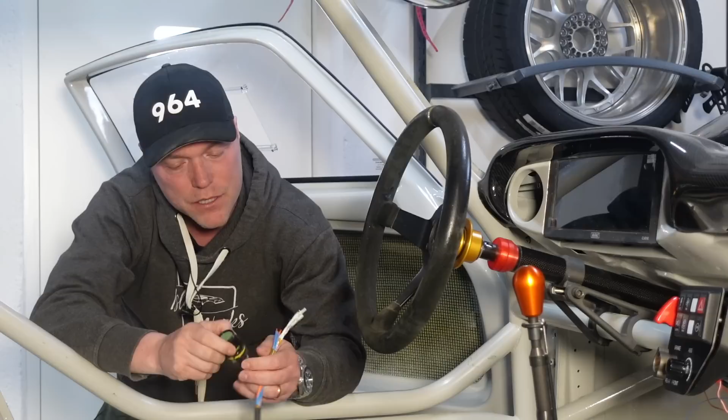In one of the previous episodes called Concentric Twist, we were building the wire harness concept, which ended up with a lot of different connectors and pieces and cables around the car. This time it is power on, which means we're going to actually turn the car on, finishing up the last pieces of the harness, trying to get things to work together, and seeing if we figure it out.

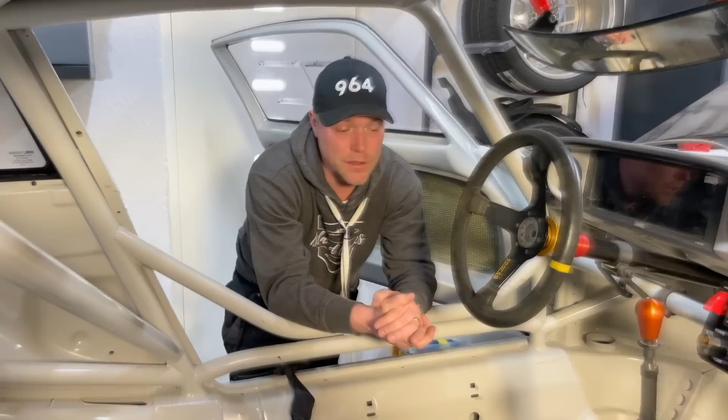So we're going to start off sort of where we left off last time. Not exactly, because I've been working away, really working away, getting things done when it comes to the harness and the engineering of it. It's an extremely tedious job, and it sometimes feels like I have a little bit of water above my head with this. Nevertheless, I have my two main harnesses done, and it's time to tie the whole car together today.

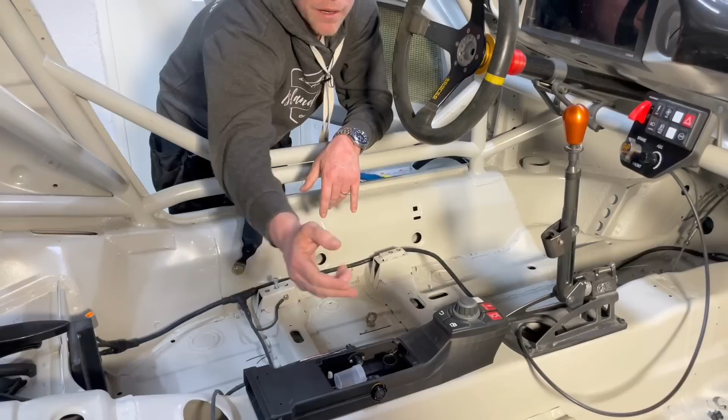So we're going to tie the different components we've built throughout the series together and hopefully turn the switch on. We have the center console here with the VCU for the suspension, the ABS yaw sensor, and the CAN bus controller. Up here we have our dash connector with the kill switch and the ABS strength, and of course the dash itself, which needs to be connected too.

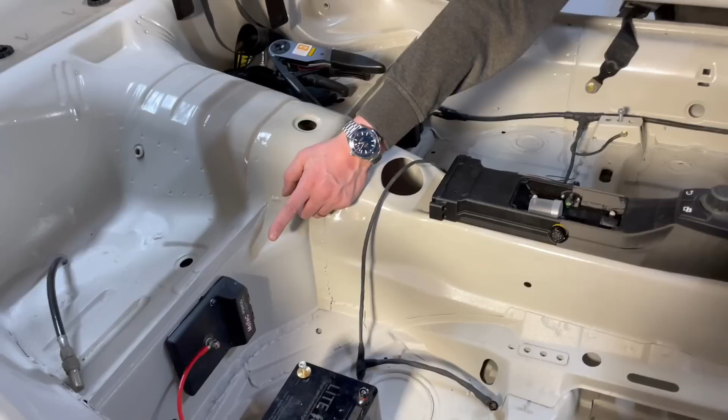We have the ECU that it needs to connect to, and on the other side we have the PDM, which replaces all the fuses and relays. And we have the battery now.

In one of the previous episodes, I was really debating with myself whether the battery should go in the passenger footwell or up in the front, or where it should actually go. In the end, I concluded it needs to go behind the passenger seat. That's where I put it, and that's where I've also put the PDM.

I've made up the harness for the other side. Let's get that installed and look a little bit at how the harness has turned out.

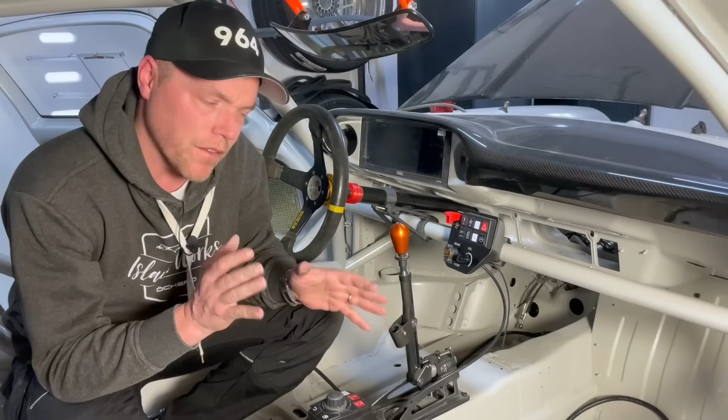Something I've paid a lot of extra attention to is how to do the transition between this compartment and the frunk in a way that's very serviceable and also looks very good. That's very important to me, which means I need some way of connecting these two compartments.

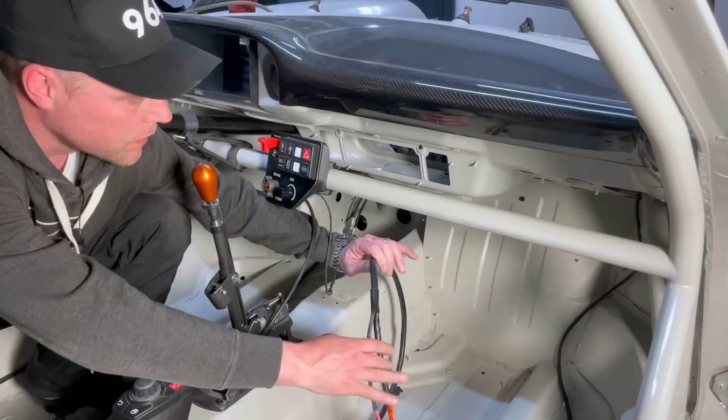What I've been looking into is whether I should use this area up here, which is where the fan used to come in before, and I don't use that anymore. So my idea is to put something in this compartment so the cables can very neatly come up and transition through.

These two looms here — this is the power connector to a lot of the heavy consumers, this is for a lot of the smaller consumers, and this is coming from the PDM, which as you can see isn't terminated yet.

So if this one could come up in a neat way here, I could create a very functional piece that makes the car very serviceable, which is good if you need to fix something, but also makes it look really cool.

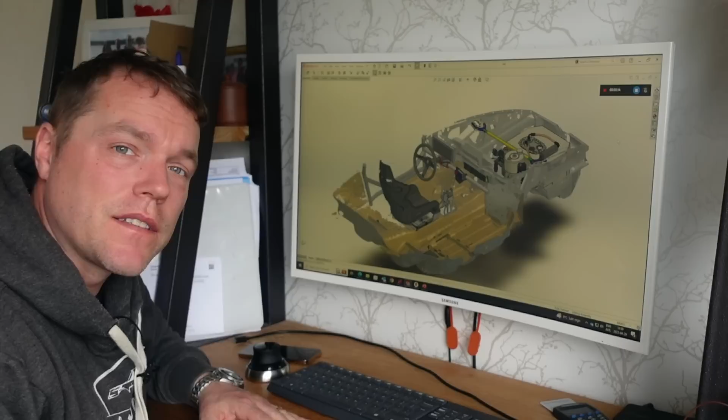Back in the office with the computer, let's look at what I'm trying to achieve with this bulkhead connector box and see if we can visualize it in a different way. The design is more or less done, but I'll show you the thought process of getting there. This is the assembly of all the different things I have in the car right now.

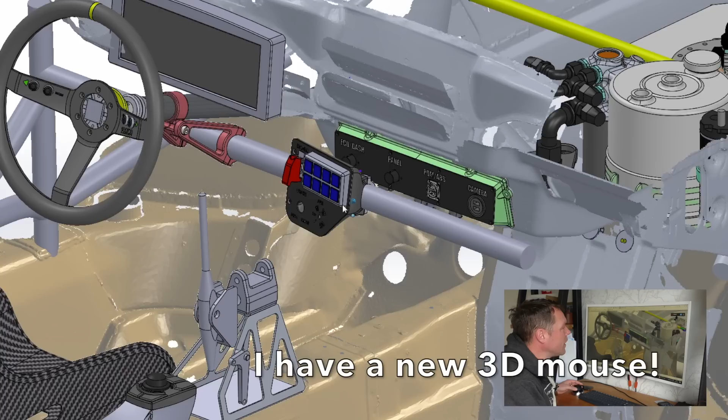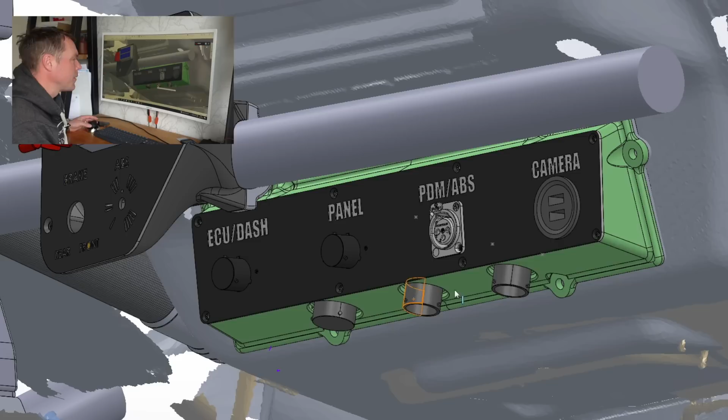What we see here is the little button panel, and if we scroll under this, we see this unit, which is the bulkhead connector box, as I call it. We see some different inputs on this one. Looking from this side, it's a bit of an awkward underneath angle, but we can see the different connectors.

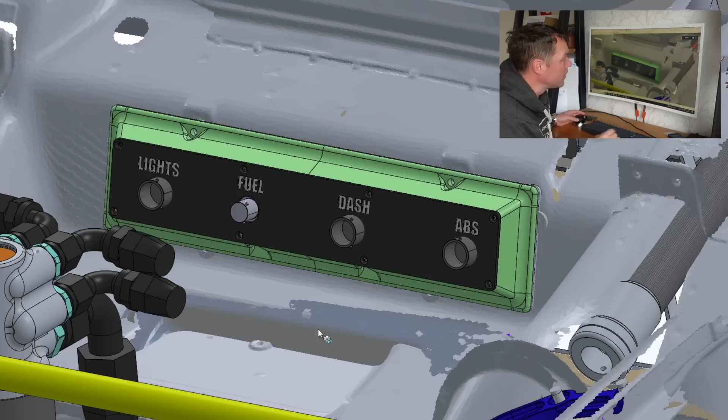We see a cover plate on top, and if we go around and look from the other side, from the front where we have the tank, fuel tank, filters and so on, we can see the connectors going out on this side toward the equipment that sits here. We have the output toward the ABS, the dash, the fuel, the lights. Not completely done on this side, but I don't think that's really the point.

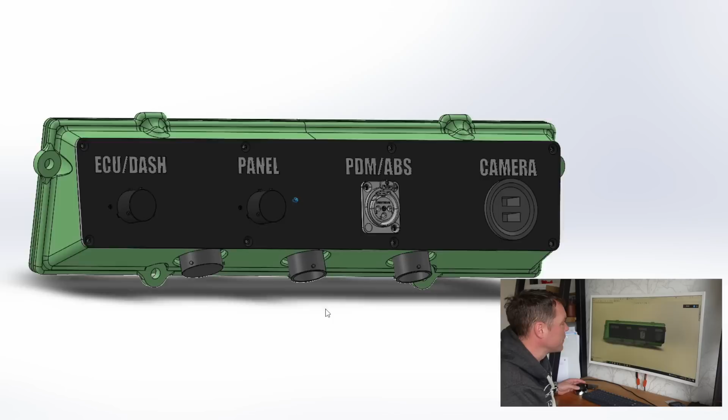The concept is here. Let's look a little closer at this actual unit. So if we look at this, what it is, we see that we have three big incoming things. One comes from the ECU, and two of them actually come from the PDM. And then we see outputs in the front.

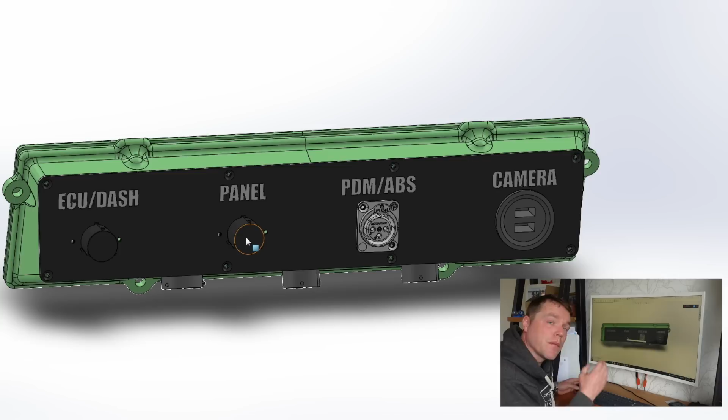We have the USB charger for the camera, because you need to have a camera in a car like this. We have the programming input for the PDM as well as the ABS. We have the panel for the little keypad. And then we have a programming output for the ECU and for the dash.

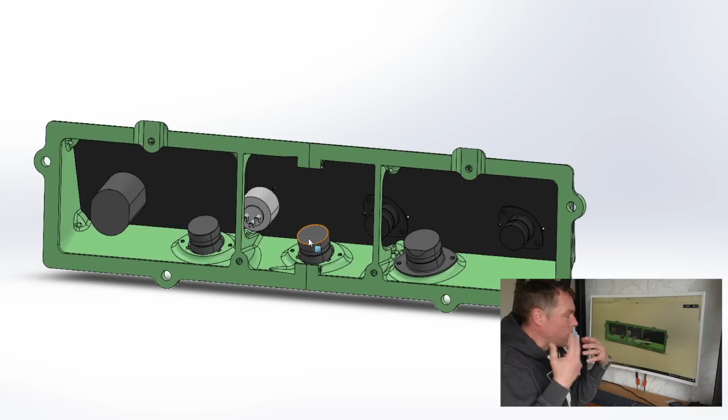If we split this one, let's split it like that. If we split it and look on the inside, we see that this is where all the magic is going to happen. We're going to pull cables in as orderly a fashion as possible on the inside. And if I ever need to change anything, pull a new cable or insert a new connector for whatever reason in the future, which I'm sure I will have to do, then it will only affect this area and possibly a new little sub harness.

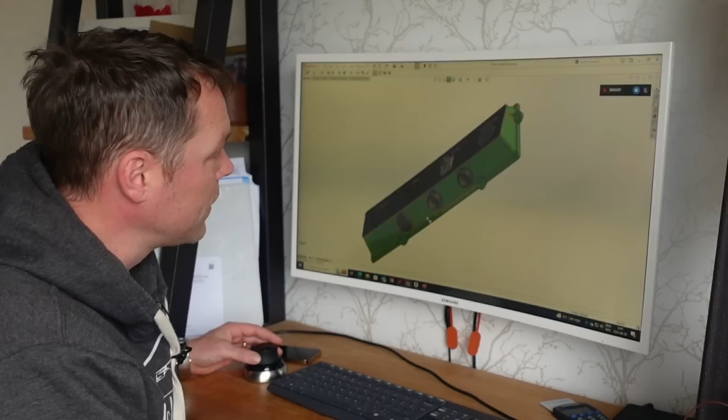So really good - the green piece here is going to be plastic, and the top piece is going to be a thin, coated piece of aluminum, just like I did on the little keypad. It's going to weigh just a few hundred grams. It's going to be really, really neat. And these connectors are super lightweight as well. So yeah, this is the concept.

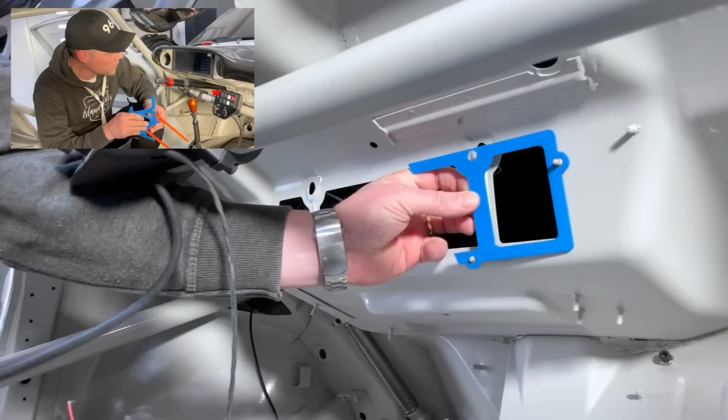Let's tailor this so it fits the car. The process is to print a number of pieces and try to see if I can get the holes and all of that to really tally perfectly with how the actual structure looks. Based on that, I can make a real transfer piece. And with all these iterations, you eventually get to something that starts illustrating a little better what the idea will look like in the end.

This is one of these pieces - color is brilliant, of course, as usual. I'm going to assemble this one in there properly, and with this one assembled, we're going to try to hook up one of the harnesses and see what we think about the idea.

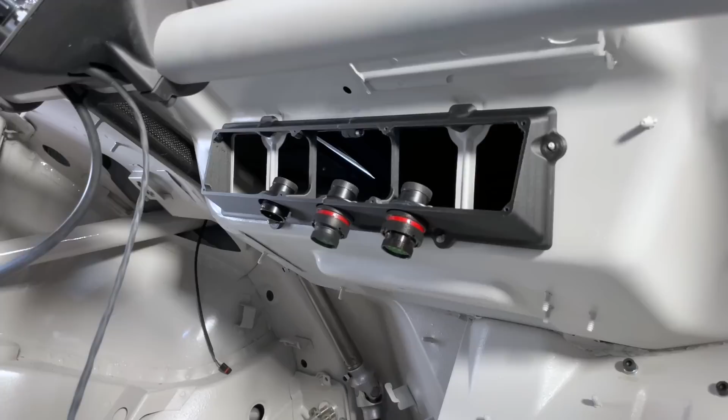This is the piece, right? It has the connectors in there, right? And I just used the little things I had there.

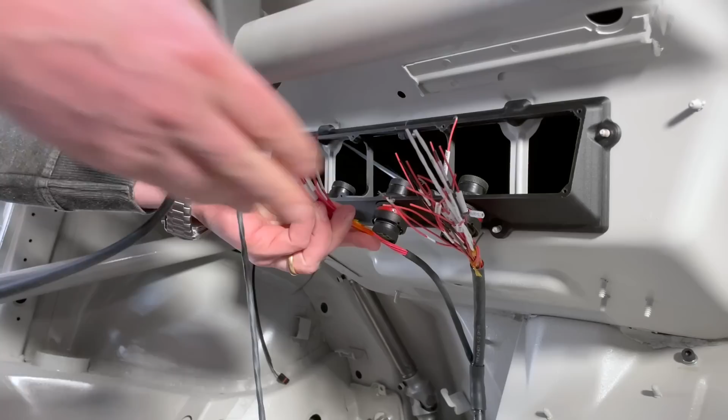Okay, so this is now the concept. There we go. Of course these ones are going to be terminated, so they look like that and they attach nicely to that one. I have one on this side that's already terminated, so you can see the boot is on it - it looks quite cool. And now that this one comes in there, it attaches like that. That's the way it's supposed to look.

In one of the previous episodes, I showed you that I had a left side harness, which is where all the signals run - the CAN bus, the communication between the different devices. It runs on the left side. Then on the right side, I have the power harness that goes from the battery to the PDM, to all of the consumers, distributing the 12-volt system of the car.

So that's this harness. I'm going to terminate the last two harness pieces. If you look at this one, you'll see it has slightly bigger pins - that's because it's higher current. And then there's one with a lot of pins that are slightly smaller. This one is for big consumers like the ABS, mainly the ABS, and this one is for smaller consumers like the washer and all the other stuff, lights.

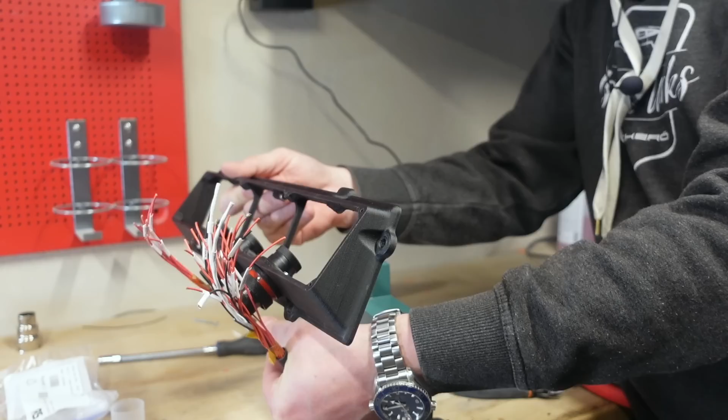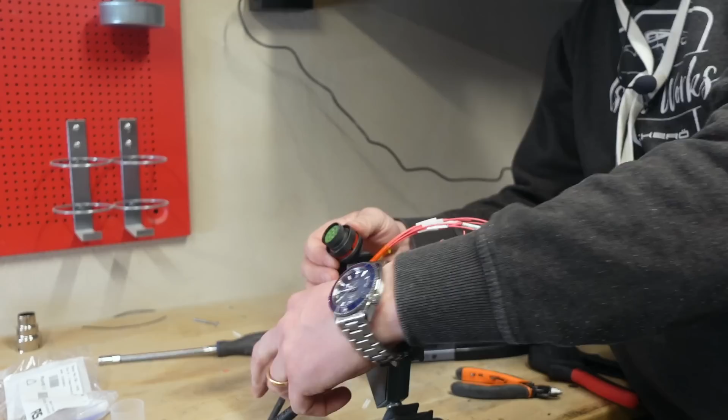So these ones are going to come up in this manner, so I know where they're going to terminate. Now it's important that I get the angle of these right. I'm going to start with the one with the bigger connectors and make sure I get this angle correct, because if I don't get it right, when I try to put it on here, it's going to be at the wrong angle and I won't be able to insert the connector.

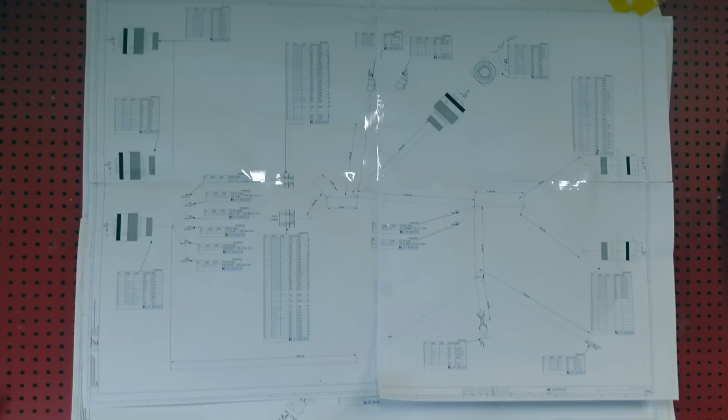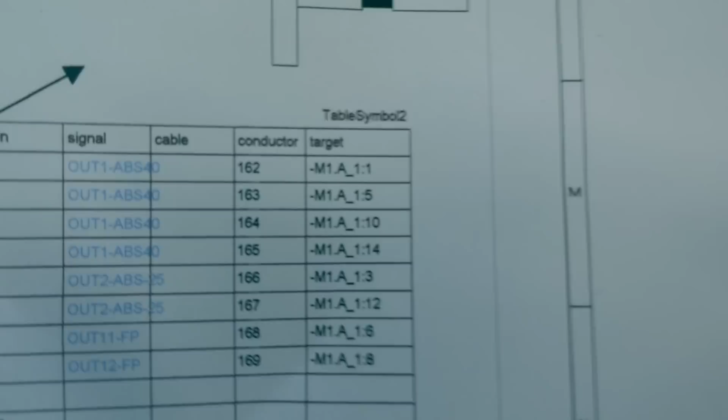So it's going to be here, it's going to be there. This is my drawing, I have it up on the wall, and I can see that this is the harness or connector we're on. I can see that cable number 1 is 162, so that's the first one I'm going to identify and insert. Okay, so this is 162.

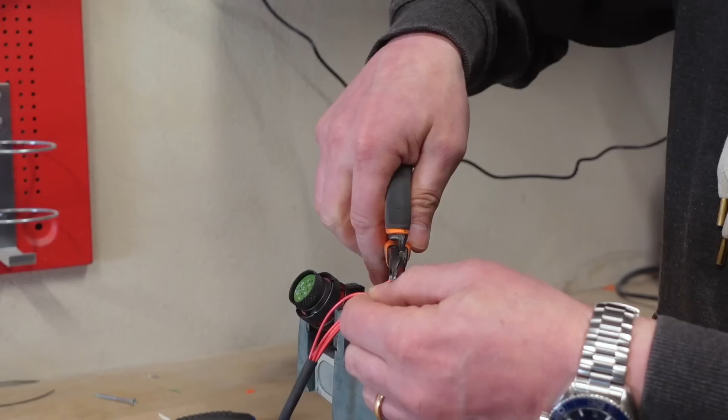I'm going to align it so that this end is by the end here. I'm measuring down so that it's towards the end of the connector, taking it off and then stripping it.

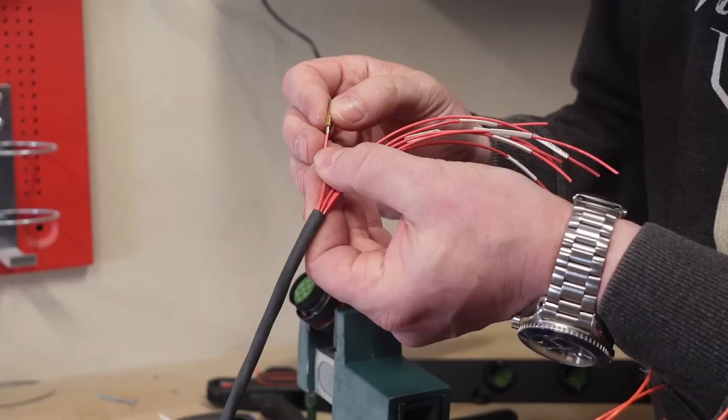Then we get to this guy. We're going to adjust this to AWG 18 because this is the high power cable, so they're AWG 18. So we take that one in there, we take that one in there. Now we have a really solid connection there. Good, I put it in through the connector.

There's a tool you can use to do this, but these cables are so big, AWG 18, that they're so stiff in themselves that I don't really need that. And then you keep doing this for a while. As you can see, it's not very difficult, it doesn't take a lot of time.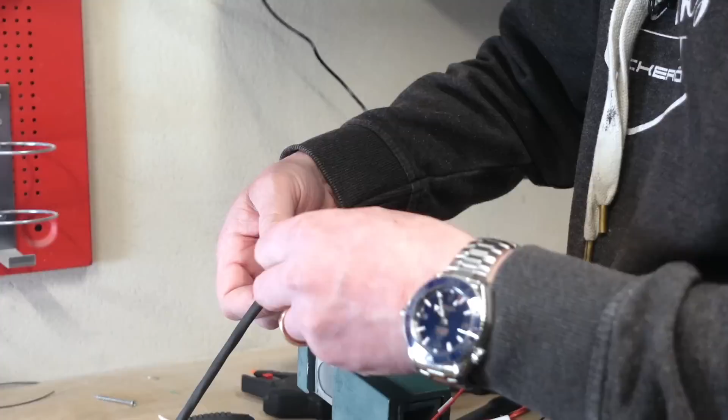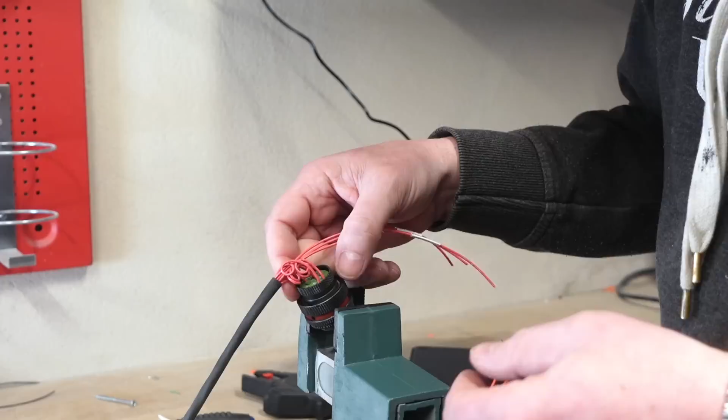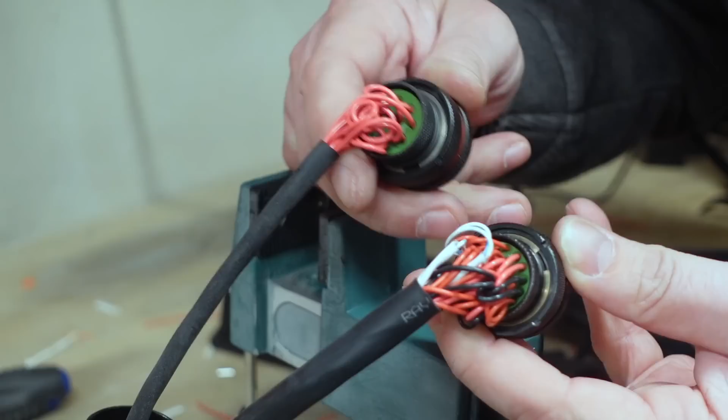Now that all of the other stuff that really takes a lot of time is done - and the stuff that really takes a lot of time is, of course, building the harness, and what takes even more time than that is designing the harness - in the end, we came to this: two nicely contacted pieces that we're going to do some other stuff with now.

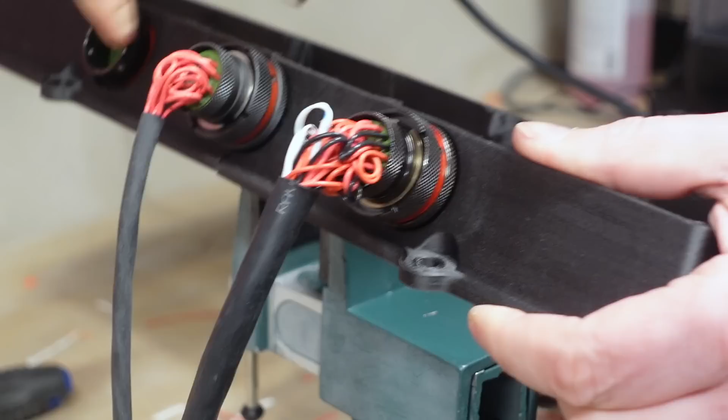The first thing we're going to do is attach them to where they're supposed to be, which is just here, here and there. Good, they do seem to fit, both of them, and this is indeed how they're going to sit. So it seems like we got the angle pretty good.

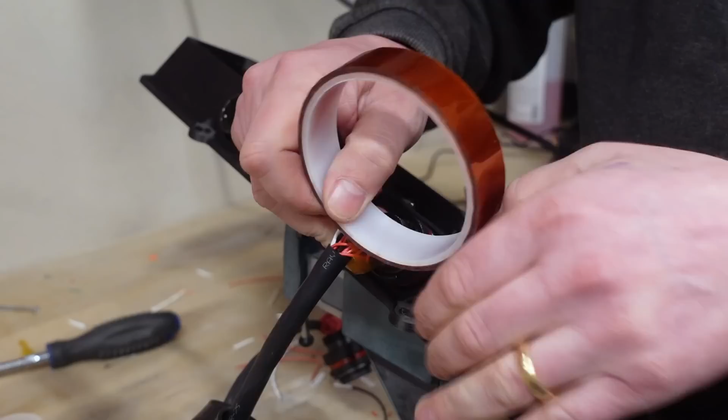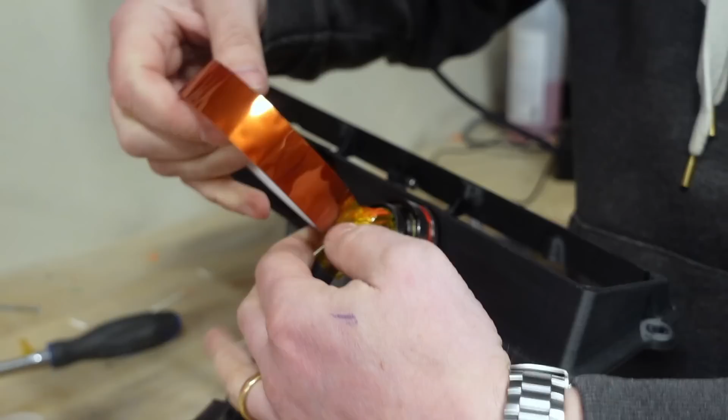Next thing I'm going to do is take some of this kapton tape. I'm going to tape this for service purposes, so if I need to go in and repair this at some point in the future, it's not going to be all glued up. Because I'm going to put a boot on this, and once I put a boot on, that boot is going to sit there with some pretty nasty epoxy resin.

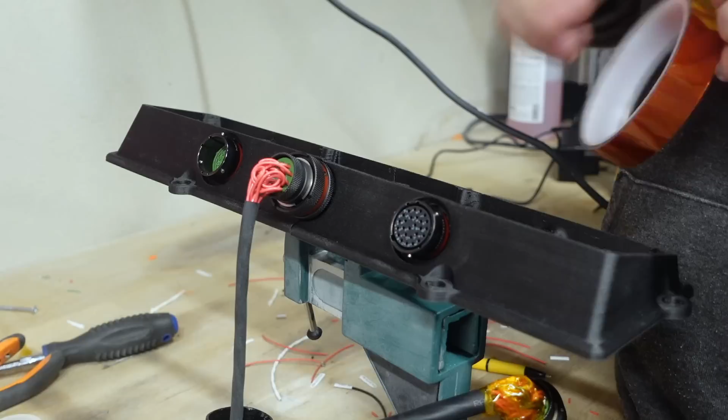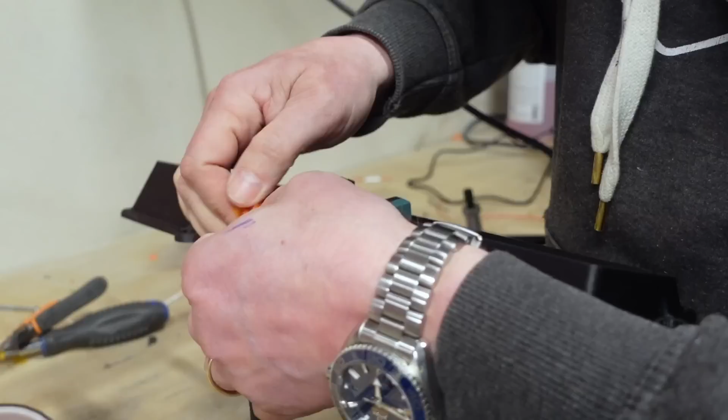Okay, like that. And the reason you also put these little loops there - it's not only for service purposes, it's also so that if you need to cut the wire in the future, you have a little bit of extra wire here.

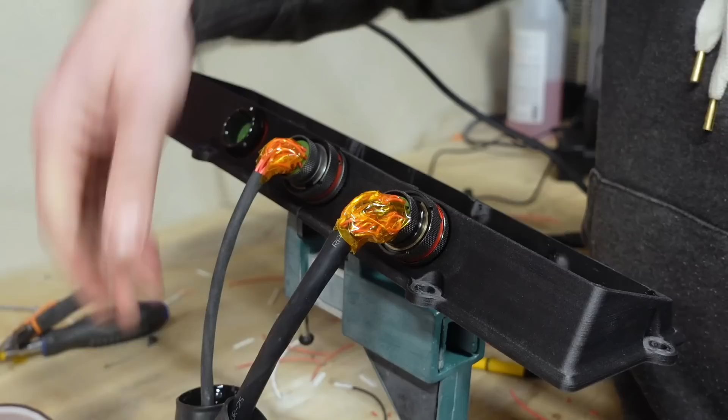Now we get to another pretty interesting step, and that is to shrink the boot down on this. So I put the boots on it. These need to get as accurate of an angle as I can.

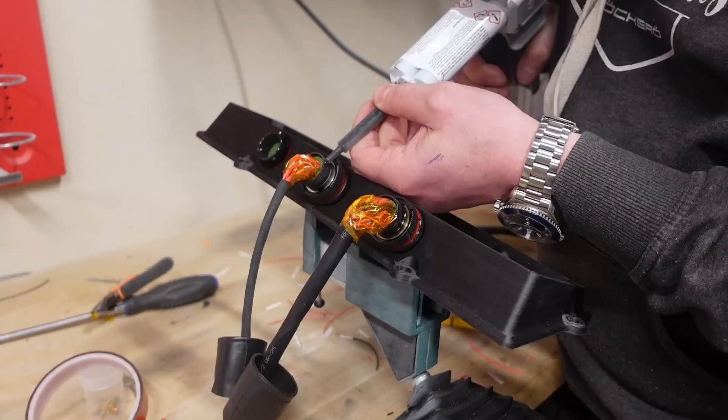So what I'm going to do is put just a little bit of glue on this little hat here, because this is the side I'm going to start. The kind of glue I'm using is a resin, it's called potting compound. So I'm just going to put a little bit of this on this connector here, so that when the boot comes on, it actually sticks there.

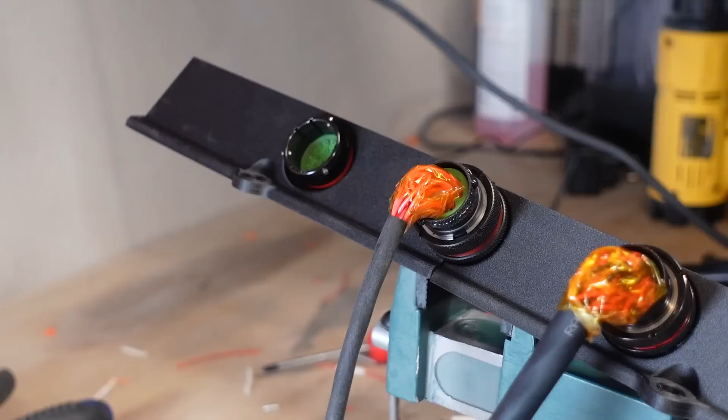So it becomes very liquidy. There are some tricks to this, and that is to really heat a lot on the lip of it. Get that one to grab first, and once that one grabs, then you can work on the shape.

So we have got it to grab on this side. Now we're just going to form the shape of it. And before I do that, I'm going to add some potting compound in this end. Actually, I think we got that one down there pretty good.

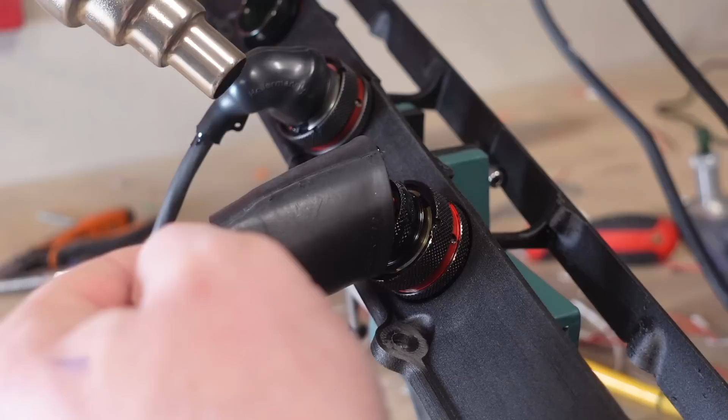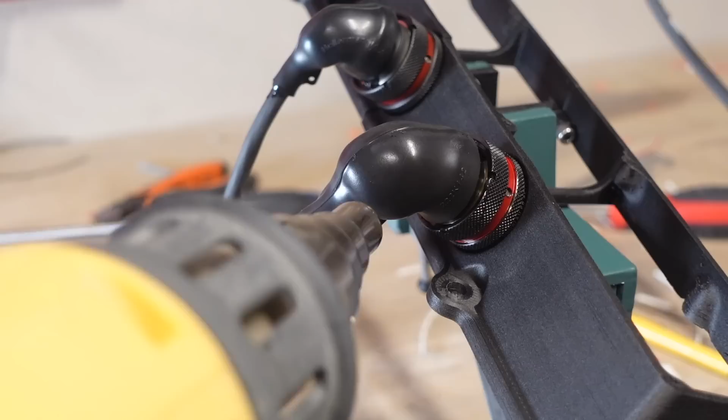Okay. I think this is actually pretty good. Yeah, let's put it back in the car.

Okay, so we got the thing installed. An amazing piece of work just trying to get this thing together. Let's see if I can film and attach this all at the same time.

Oh, there we go, first one. Let's see, second one. Pretty good, huh? Third one. Oh, that looks pretty cool, doesn't it?

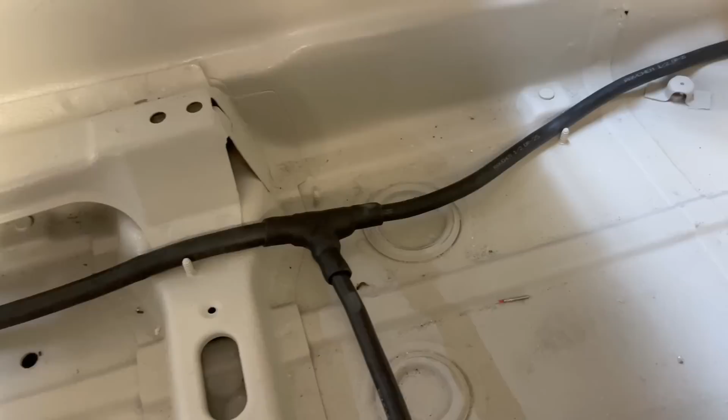So let's have a look at how this turned out. It goes down here, with a little branch off point that continues on back to where we have the battery and the PDM. As you can see, I haven't put the boots on the PDM yet, because I want to see that it works first.

I did connect the PDM to the battery, so it should run soon. The battery is hooked up, the CAN bus to the battery, as well as the kill switch to the battery. There's an interconnector here that connects the right side of the car to the left side, where the other harness is running. And then we branch off and go up to the center console here.

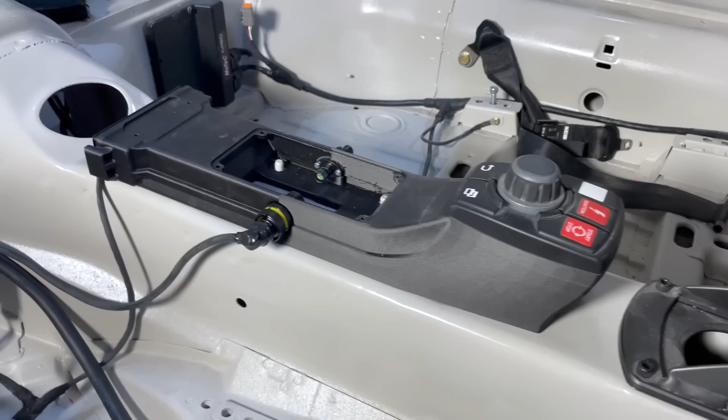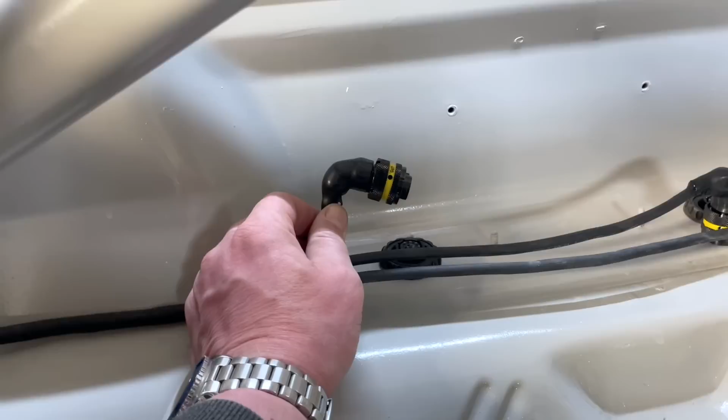Then I wanted to show you something I did with the branch that goes up here. I have one branch that goes all the way up to the very back, with two connectors. This one actually goes to the right wheel, and it sits in a little insert I made with a big thread on it.

This insert then goes to this connector, which ties down like that. So that will go to the right wheel, and this one over here will go to the left wheel. Cool, huh? And then it will continue back to the engine.

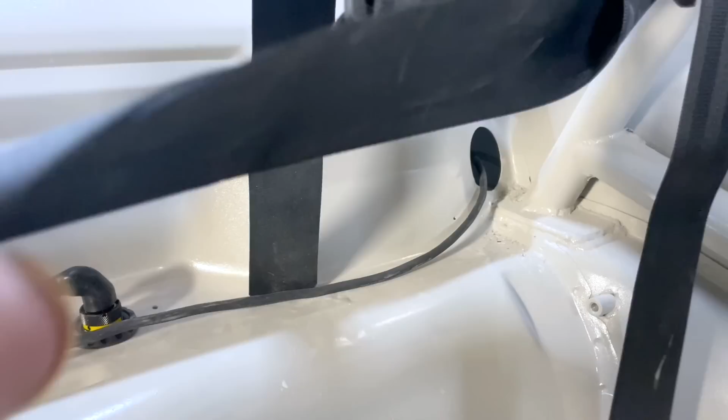There's one small harness piece missing, which will go from the engine down to the ECU, connecting to those two contacts there. And the strange thing with all this is that you can't see how much work goes into just fiddling around with these cables.

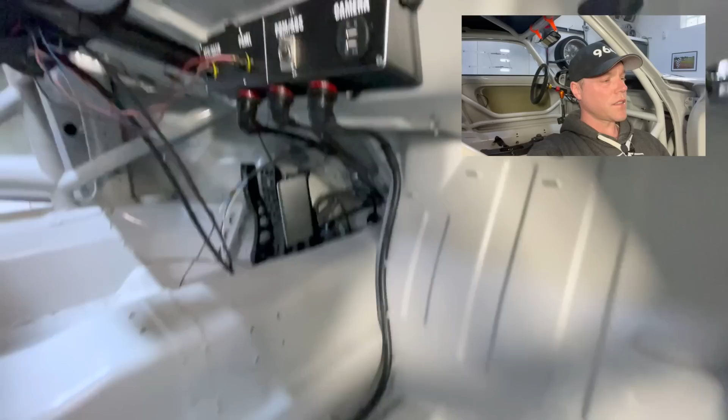You really can't, because in the end it's just connectors, and it looks like something you bought in the store, but it's really a fantastic amount of work. That's why it's taking so long to get the episodes out. But where I am right now, it is actually time to maybe flip the switch.

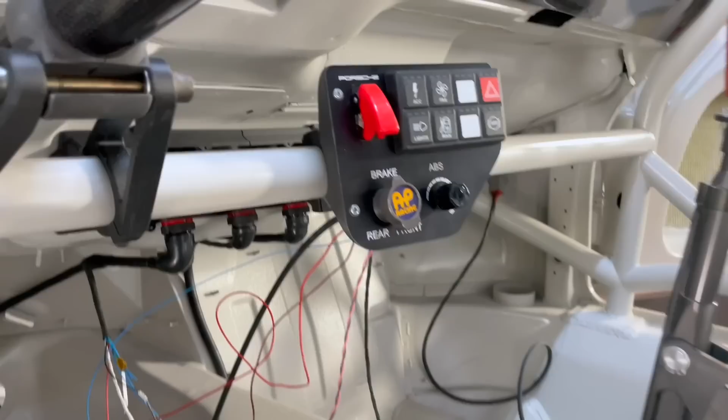Okay, so here goes test number one. I have the battery connected, and I put a multimeter just measuring on the battery. Then I did a very temporary installation of the keypad dash there.

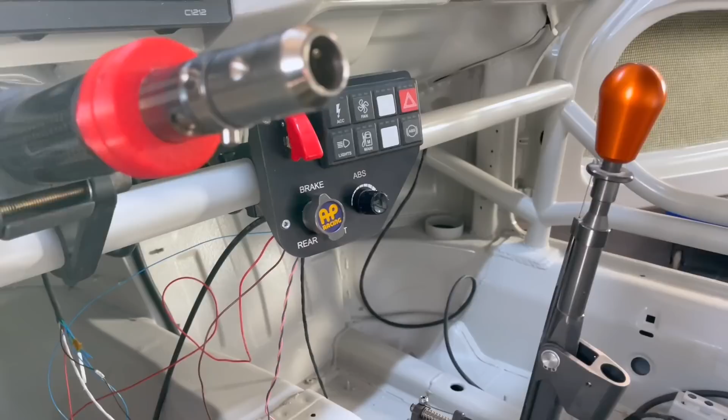It looks like this. The CAN bus is connected, the kill switch is connected. I know this looks terrible, but nevertheless, we have 0 volts right now.

And if I go over here, oops, and I turn the car on, nothing happens, right? Because nothing is really the way it's supposed to be. Now the battery is actually on. And if I flick the kill switch, boom, it should go off, and it did. This is because this Lightbox battery has an FIA approved kill switch built into it.

Then I will have one switch over here, and one external switch just over there. Cool, huh? Of course, that is one exciting moment, seeing the multimeter go to 12 volts. Sounds ridiculous, I know, but to me it was pretty exciting.

So moving on to the next piece, we get to the necessity of actually communicating with the car. Because I can flip the switch and the power goes on, but nothing happens. That's because I need to program the PDM so that when I push this button, this happens, and when you turn the ignition key on, this happens, and so on - all this good stuff.

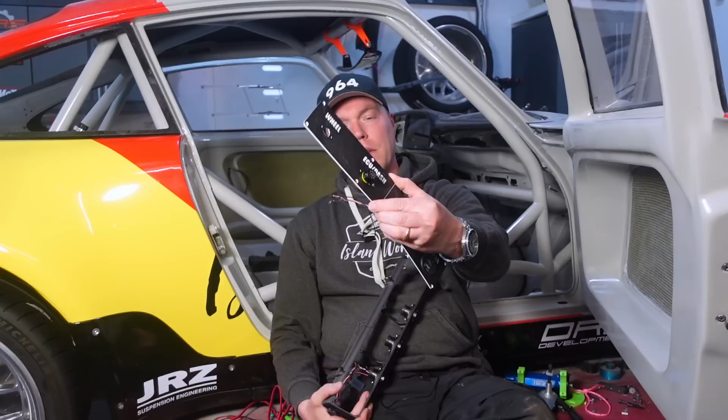I have this, which consists of this, plus, if you remember in the 3D model, a little plate on top of it. This follows the production methodology I used for the little keypad dash in the front, where the back cover is plastic and the front cover is a very nice, thin aluminum plate that I got help with from a Norwegian company called Myhre Skilt. I'll put the contact details in the description.

This version here is just a 3D printed one, and I had to do it in 2 pieces because my printer is too small. What's so important right now is this piece here - this is the one that is actually the connection point, the communication point to the PDM.

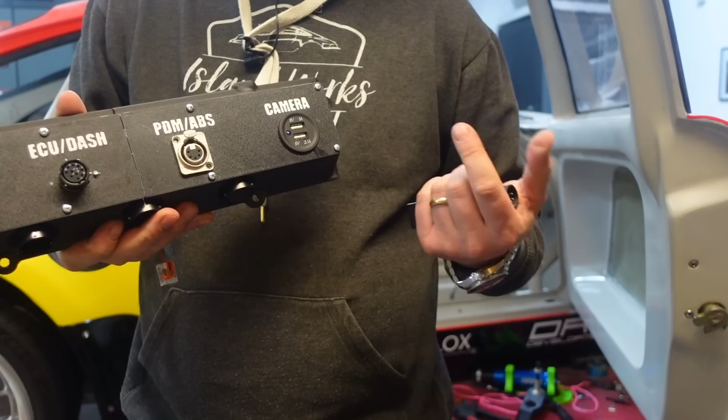So let me just hook this up and I'll show you. And we can see some goodies here. We have a camera port. This is to charge a camera because, yeah, we need this nowadays.

Next one here is PDM, so this is where I'm going to put my CAN to USB module to program the PDM. I'm also going to use this port to program the ABS, since I have one of these Bosch race ABSs. This is what it is when we look on the back side.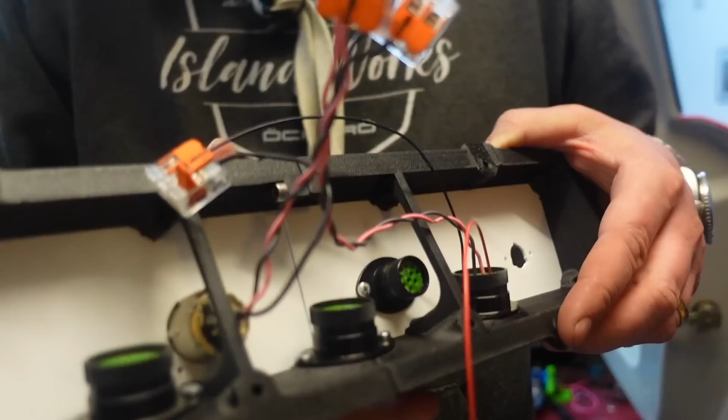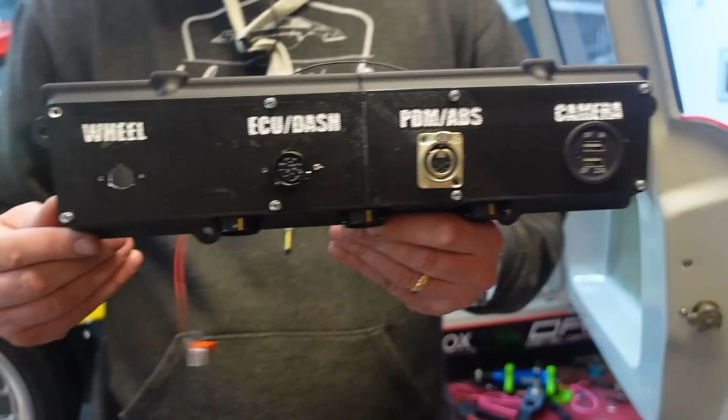Since this is just for test, I have just taken the CAN bus wires together. You see they come from the connector, and then they just go together in these little splice whatever things, and I've just pulled a few of them out. In the end, this is going to be nicely wired as it can be here in the back. You're never going to see it because it's going to be behind this one, and whenever I need to change something, I just change it here on the inside. Brilliant, huh? So we got this thing in there with the fake little plastic plate.

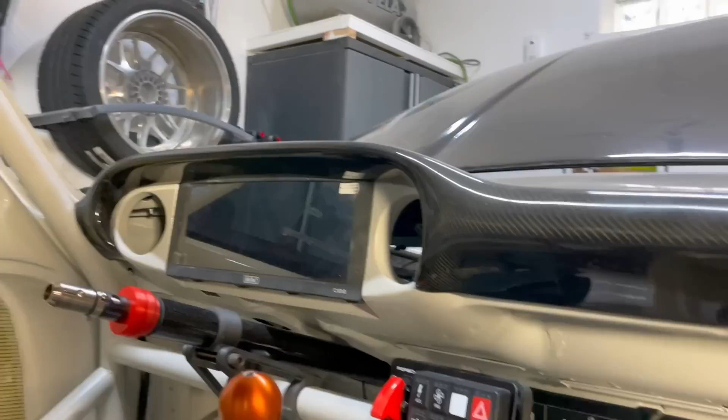So now we've actually connected even the dash. I took the opportunity to connect the dash as well. But now when I turn it on here, nothing happens. Although everything is connected, it's because the PDM doesn't know what to do. Right, power comes on, but now what?

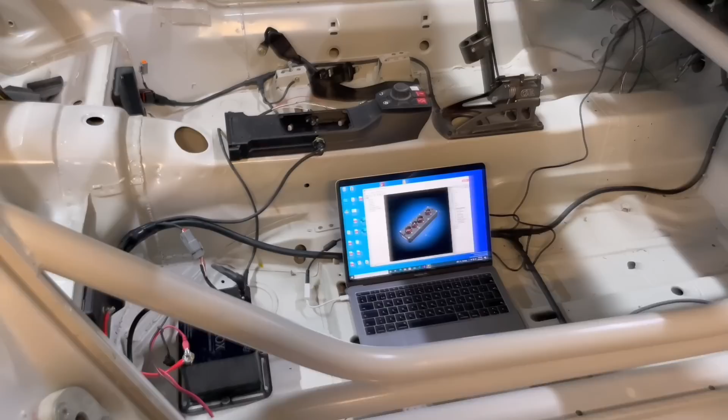So we take this little programming adapter and I try to stick it in over here. Come on. And now I get a USB cable. So just like in the previous episode, I think it's called Wireless Porsche, where I programmed this, I'm just going to reprogram it now so that it works, and then it should go on. So here we go. I have my computer here, and I have it connected there into the dash.

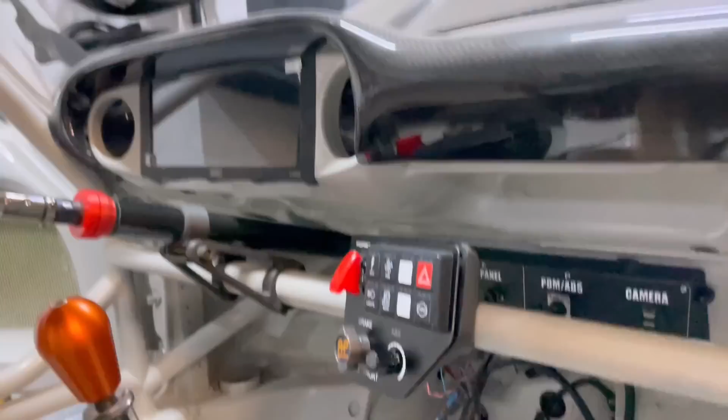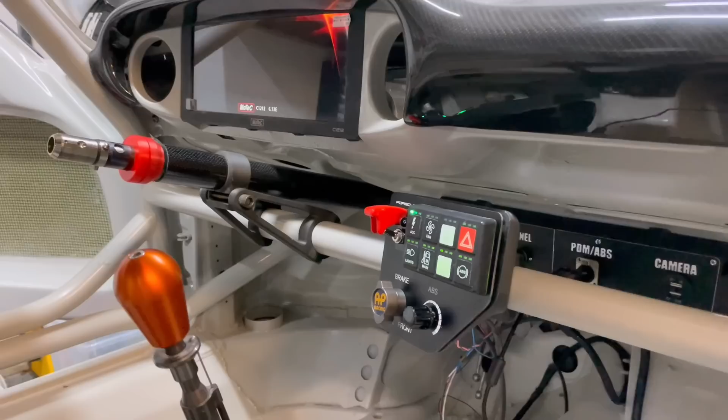I have connected the rest here so that it should be funky and ready to go. What now happens if I do this? Boom. Dum dum dum dum dum dum. Look, it's coming alive. And it is live. Look at that. Wow, it really is live.

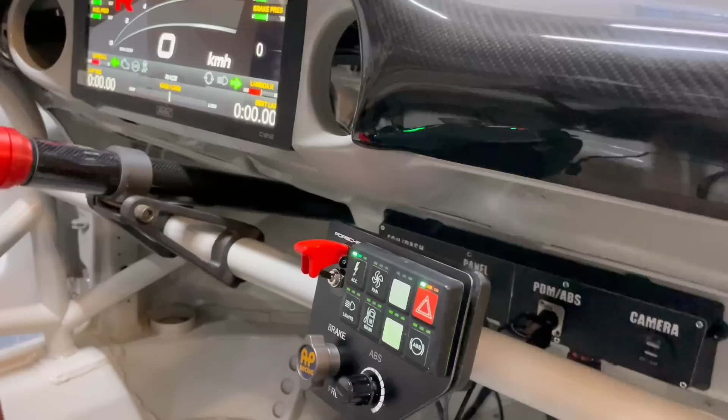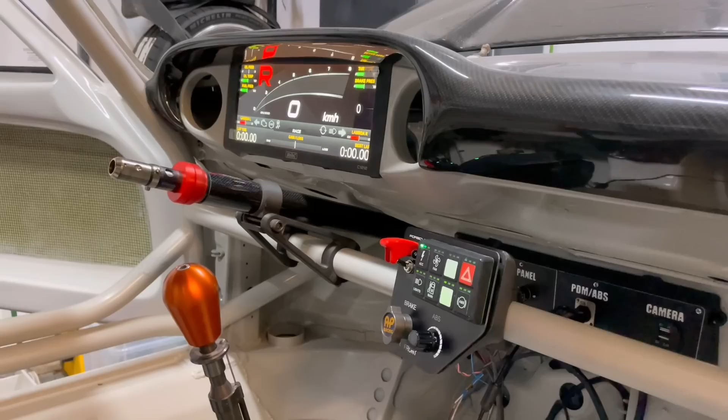And what happens if I click here? It actually starts running. Wow. And it's blinking over there as well. So CAN bus network is working, dash is working. I'm making some progress. And we're going to do the same thing from this side.

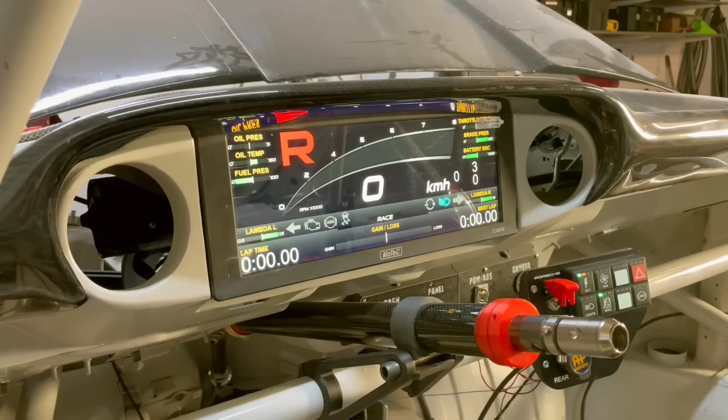So I'm going to turn this on. It will come on just in the same manner as it did from the other side. What I want to try now is if we can get the ECU to actually communicate with the dash. We do that by turning the ECU on, which is this one. What we should be able to see is that if I push the accelerator pedal down here, you see there in the top right, the throttle is actually working. Right, so the ECU is working.

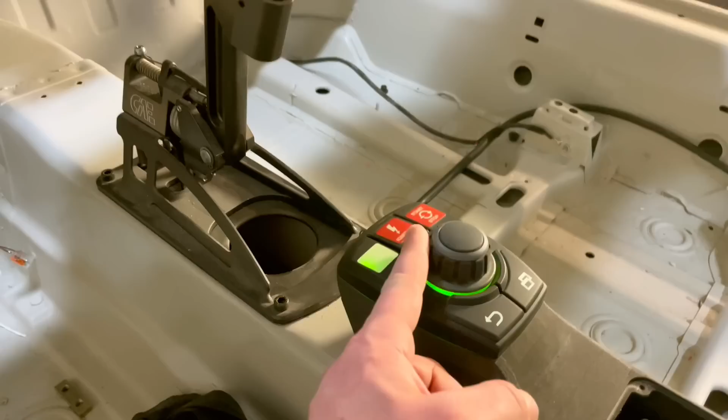I also want to test the rotary controller. So if I press change page on the rotary controller, it will work like that. If I turn this one, it's connected to the traction control on the ECU right now, so I will actually—it may be difficult to see on camera, but I can see that this one here changes color. So seems like it's all connected. I have not managed to get the CAN bus from the battery, so I can see the state of charge on the battery and the state of the kill switch and all those things, faults, alarms, whatnot. I simply can't get the CAN bus to work, but yeah, I'll figure that out.

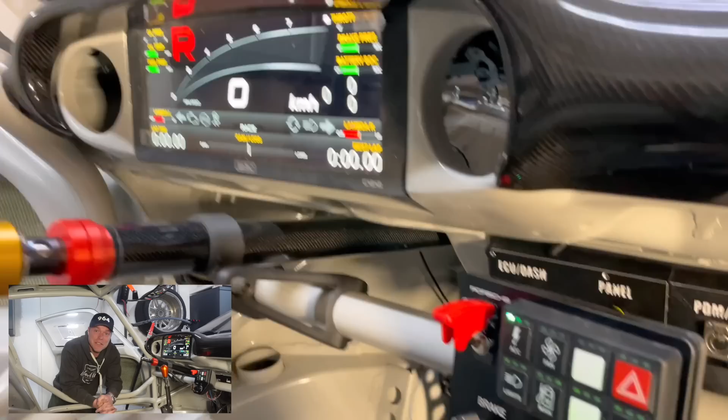Of course, this is super exciting. It really is, and not to hide or diminish the huge amount of work it is with the wiring, the engineering, the troubleshooting, getting the components actually to communicate with each other again, figuring out why they're not. Is it wiring, which it has been a lot of the times? Is it address allocation? What is it? And that's why this has been taking such a long time. However, this is a major hurdle that I've passed now with getting this done. And I foresee that some other things are going to be a little bit downhill from now with completing this.